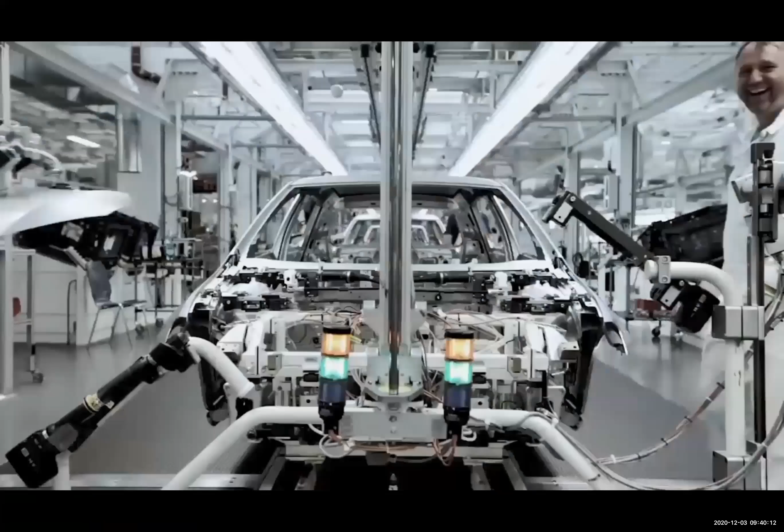New technologies are changing the world. They're also making the cars manufactured by the Volkswagen Group more efficient, safer, and more customer-friendly. The nature of car manufacturing is also changing in a similar way. In fact, the next batch of innovations is so extraordinary that experts are already declaring the dawn of a new industrial era, Industry 4.0.

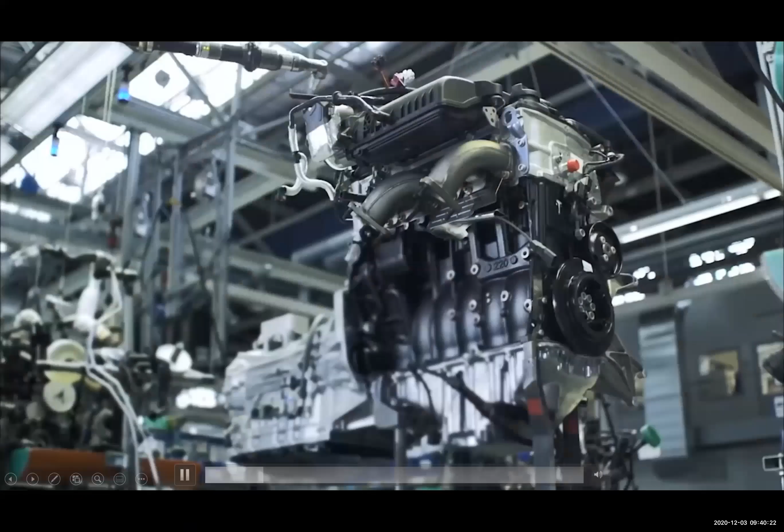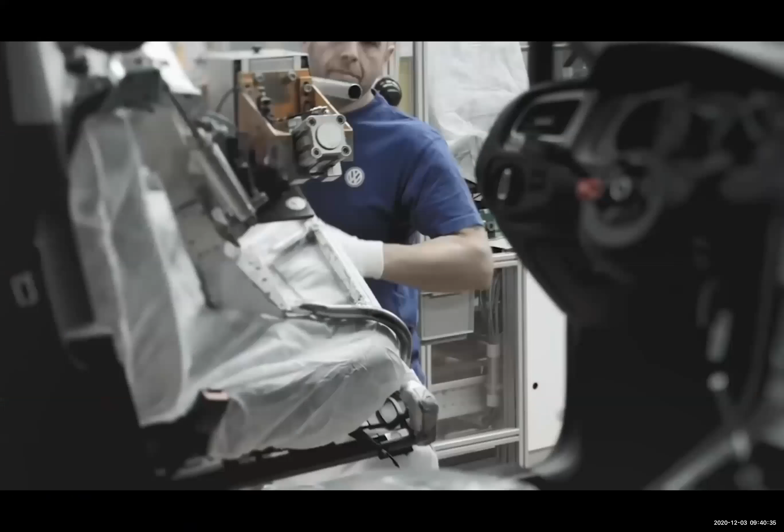So what does manufacturing look like today? Traditional car production involving hundreds of identical vehicles lined up in a row no longer exists. The options available to customers are now so vast that each car becomes a unique and individual object.

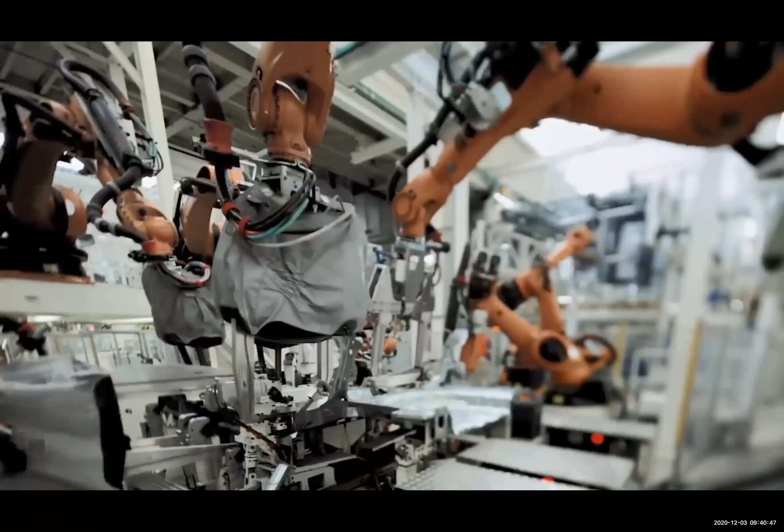Cars are now manufactured to order. Data makes its way from the customer's order to the Volkswagen Group's systems and then to each individual section of production.

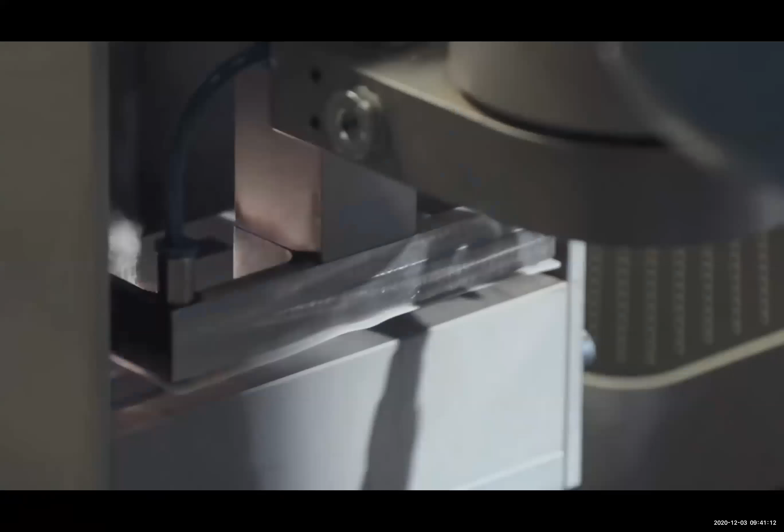A car consists of many thousands of individual parts. The press shop processes blanks for the bodywork. In the body shop, the car is baptized - in other words, it's given an RFID tag that can track it via radio frequency. This establishes which car body belongs to which customer order. The paint shop also receives information from the system world.

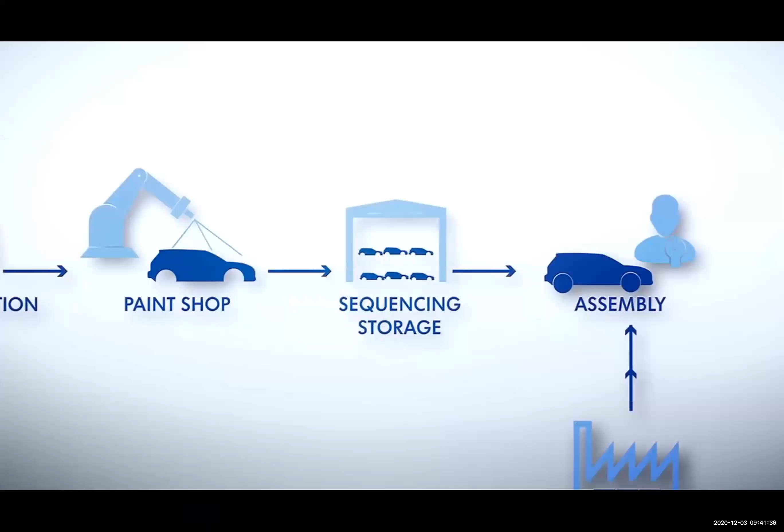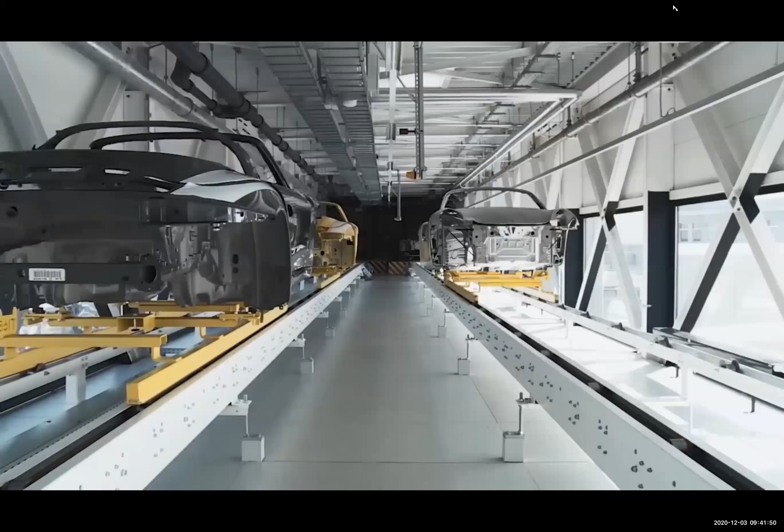In sequencing storage, the cars are placed in an optimal order for assembly. From here, information is transmitted to suppliers and pre-assembly as to which part is required when and where. In final assembly, the finished car emerges.

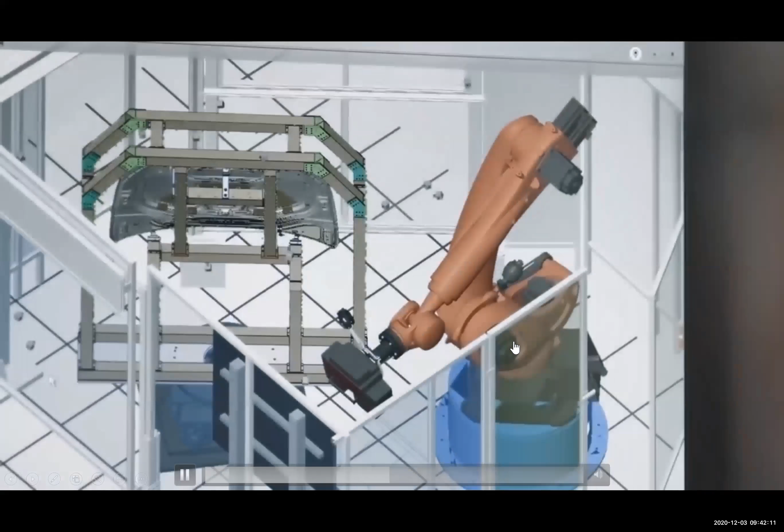The Volkswagen Group manufactures its cars using state-of-the-art technology, but development and innovation never stop. What does the future hold in store?

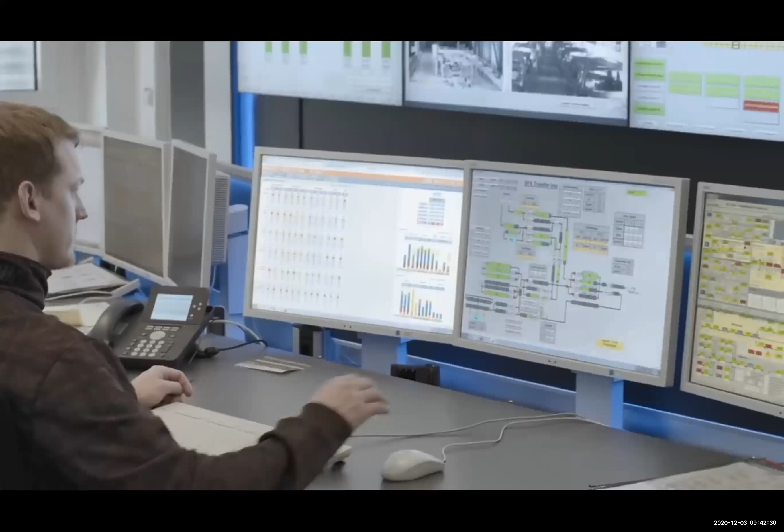Today, everybody is talking about Industry 4.0. It is a term used to describe a variety of innovative production processes. But what exactly does it mean? The Volkswagen Group has been shaping the future with groundbreaking projects for many years. Here are some recent examples.

Digitalization: the digitalization of all elements of production is essential for a new era in industrialization. Everything is given a virtual likeness in the system world. The result is an Internet of Things.

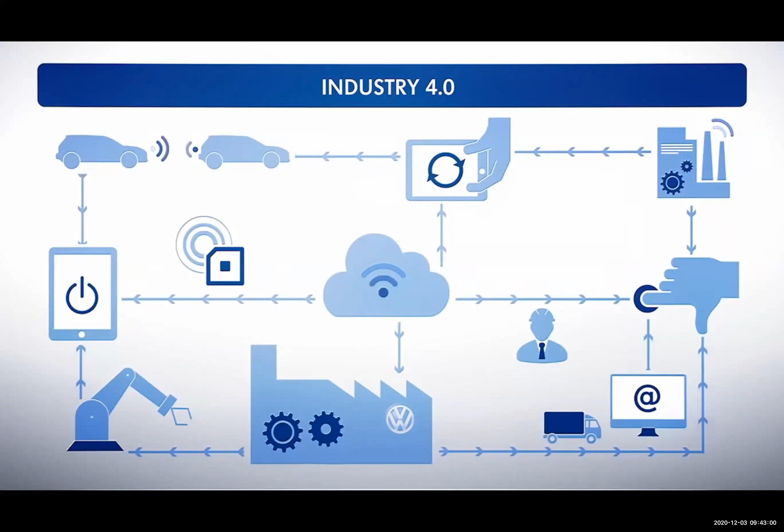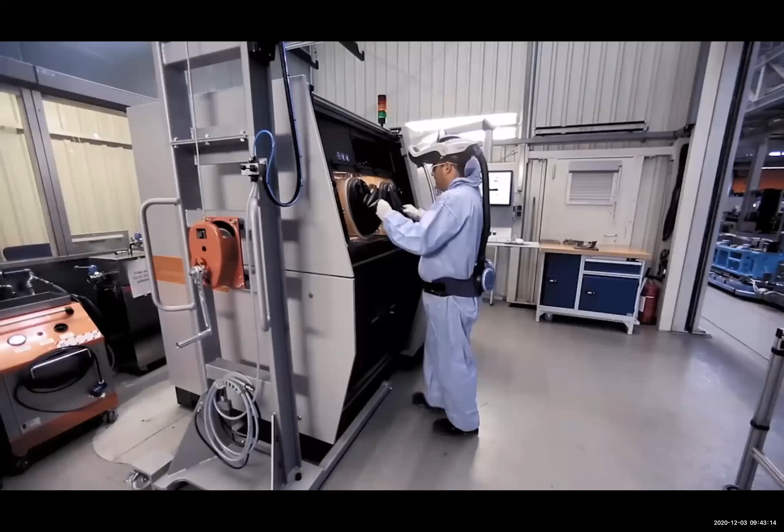Example, 3D printing. Pressing tools are no longer shaped in a laborious manner. Instead, these tools can be made from steel granulate in a 3D printer. It's a technology that opens the door on completely new possibilities for design, with a level of precision unknown until today.

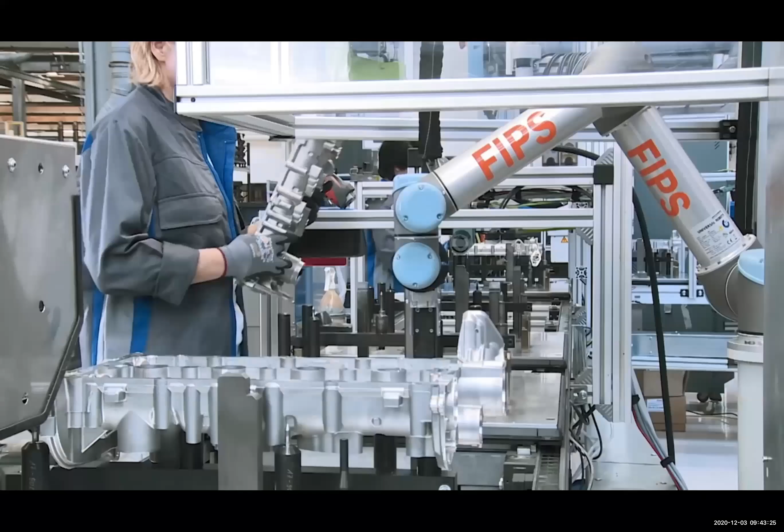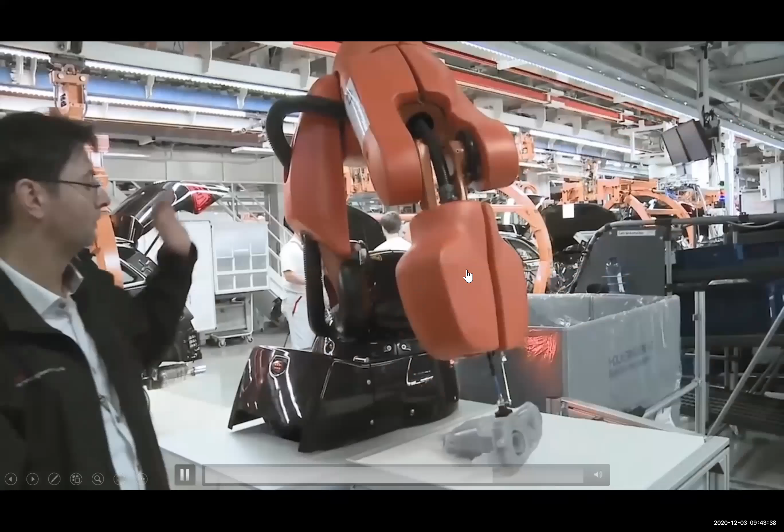Example, human-robot cooperation. In the past, protective grids separated robot arms and employees. In the future, employees and robots will work increasingly hand in hand. This is made possible by new security sensors. Robots take on especially monotonous and arduous activities. Today, robots already play a part in contributing to ergonomic workplaces at the Volkswagen factories in Chemnitz and Salzgitter.

Example, Big Data Monitor in logistics. The Big Data Monitor enables rapid visual processing of data from the 1,200 suppliers of the Audi factory in Neckarsulm. Where are the potential bottlenecks? Where is the greatest need for action? This data is now easily accessible at all times.

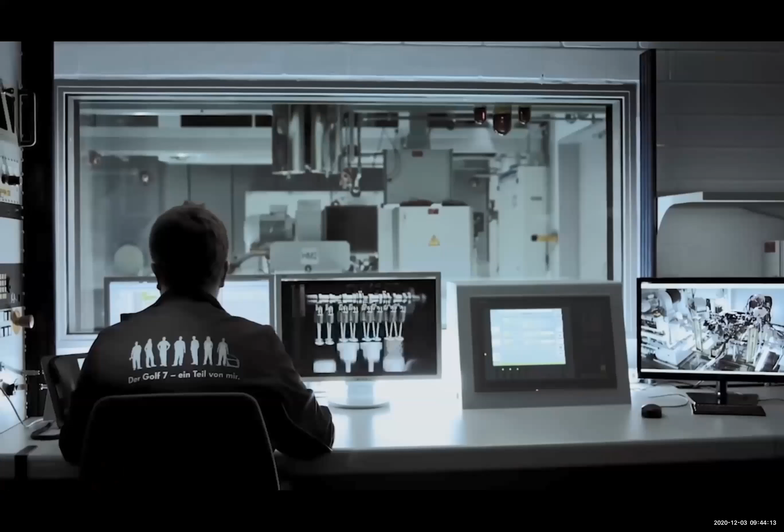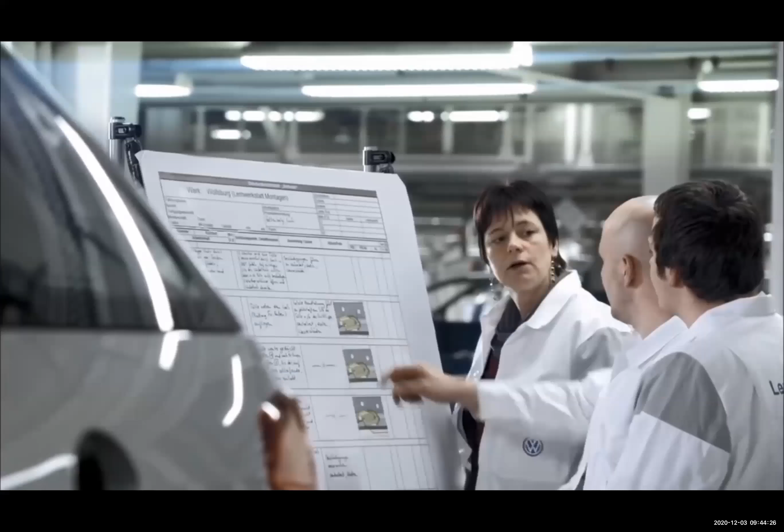The intelligent factory of tomorrow paves the way for efficient and cost-effective production unlike ever before. Industry 4.0 also means brand new opportunities for employees. The Volkswagen Group has already begun actively preparing its workforce for the future. The world is changing, not only in the automotive industry. Everything is in motion, and the Volkswagen Group provides the technology that moves the world.

Yes, so that's Industry 4.0 for you. So Industry 4.0 is basically a combination of technologies, I would say - Internet of Things, data analytics, and then artificial intelligence, robotics - everything put together would be your Industry 4.0. So it's a combination of technology where each machine can communicate with other machines and then to the control unit, and then the production becomes more interconnected and smarter. So that is Industry 4.0.

Even in the production of cars and automobiles, no more thousands of identical products are being produced in the industry. So each customer, we as a human being, as a customer, can tell this is how unique I want my car or bike to be. Even Royal Enfield have launched, you can choose to design your engine guard, the seat, the alloy wheel style, and then the silencer, everything.

So this data is fed into the production unit, and then each vehicle is identified by an RFID tag, and through the RFID tag, the entire production process is being taken forward. So this is how Internet of Things and smart systems help us in the fourth industrial revolution.

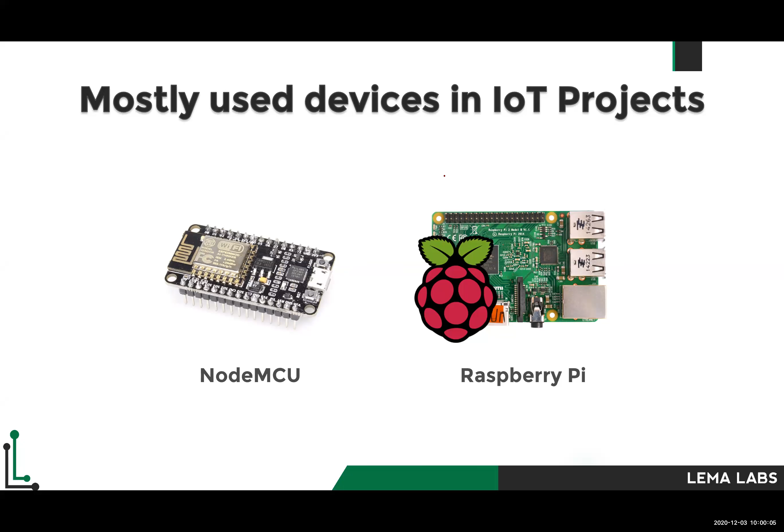So now, what are the other boards? Are Node MCU and Raspberry Pi the only devices available for you? No, we have a lot of very well-known devices available in the market as well, like ESP32, which is an advanced version of ESP8266, because this has both Wi-Fi and Bluetooth connection in the board itself. So for wearable technology, it is recommended to go with ESP32.

And then we have other boards like BeagleBone, Tessel, Intel Edison, and also Texas Instruments have a lot of boards. Apart from that, when companies design products, they won't choose boards like this, they will definitely choose a platform to work with, either STM or ARM microcontrollers, and software that can be used for device connection. Through the session, I'll definitely help you understand how you can write programs, connect devices, everything. So please be patient and listen to the session.

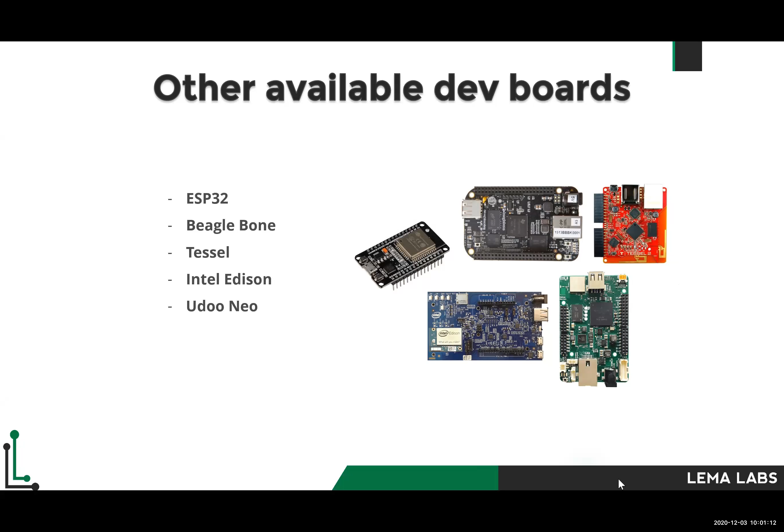So now, the board that we have chosen today is a Node MCU. Why we are choosing a Node MCU is, I'm sure your students would have taken an Arduino board and come to you showing their projects for so many years now. Arduino is the most commonly used open source platform when they work on a hardware related project.

So with Arduino, if you give a Wi-Fi capability, that is equal to a Node MCU. Node MCU is an open source platform again, and it has an inbuilt Wi-Fi chip in it, and you can program it using Arduino. Not just Arduino, it supports many other programs like Lua script, even embedded C also you can program, but you can program it using Arduino as well. So people prefer a Node MCU development board because of these reasons.

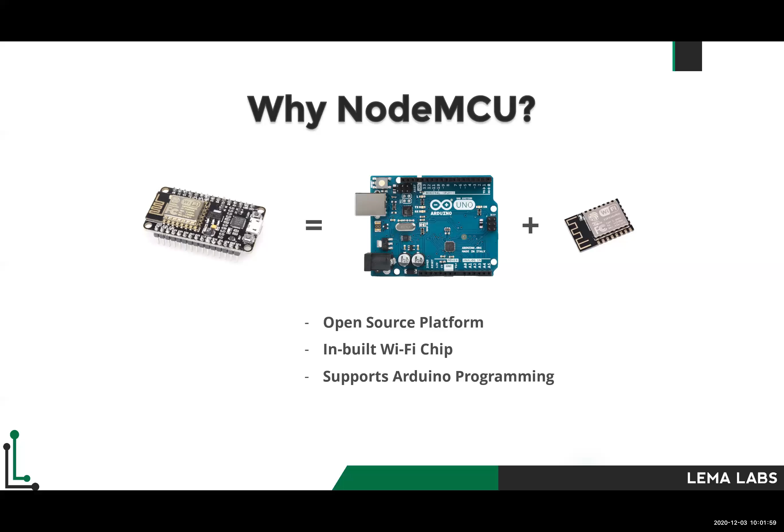So what you're going to learn today, practically in the sense, you can definitely try out after the session. Even some of the parts, if you are having a system with you, you can try in parallel as well, and see if you are also able to work and design like how I'm doing from here, showing the demo. So what you will learn through the session today, first thing - software. Someone was asking what software should I use to work with IoT.

So today I'll teach you how you can program an Node MCU microcontroller board. That is the first knowledge that I will share with you.

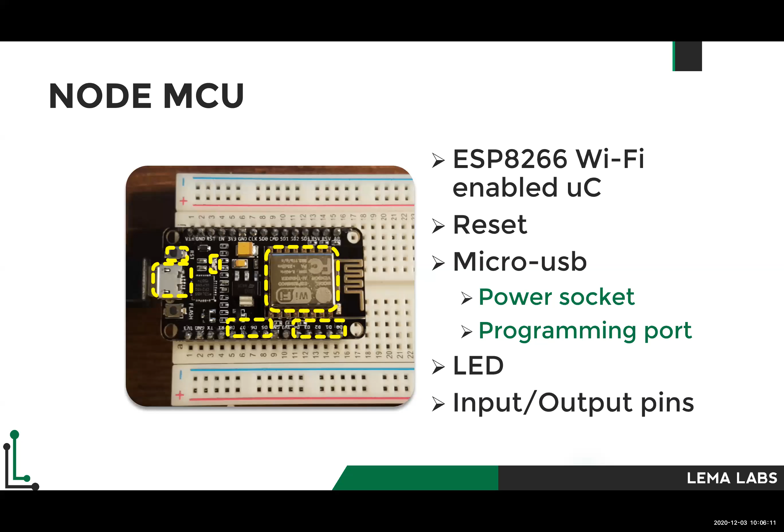You can see the pins that are here, and even on screen you can see the breadboard connection. Here you see a lot of pins - those are the pins to which you will interface your input and output peripherals. So it has a Wi-Fi enabled microchip, and all input and output peripheral interfacing pins. It has some inbuilt LED, a reset button, and a micro USB to quickly program and power it up as well. So these are the highlights of a Node MCU microcontroller board.

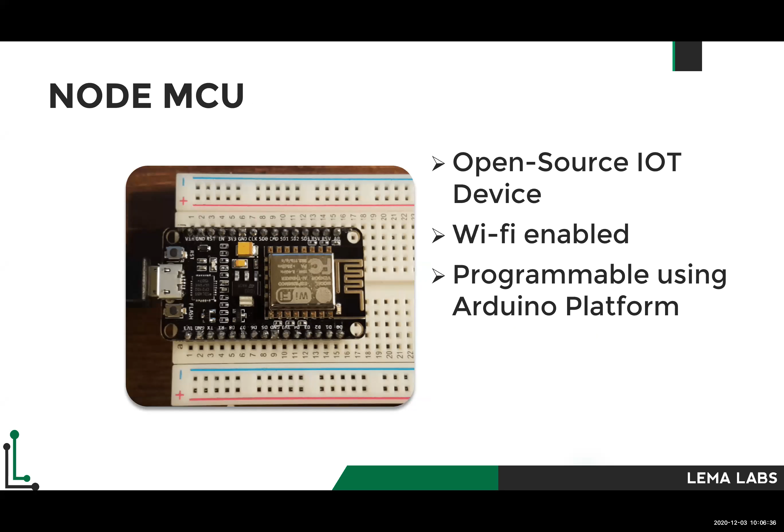The reason I have already told you why we can choose a Node MCU board is simple: it's an open source device, Wi-Fi enabled, you can program it with Arduino, and it is also cost effective. This board will cost you somewhere around 300 to 350 rupees, not more than that. You can get a board, have it with you, and start building a lot of interesting IoT related applications.

Now, to learn how to program this particular board, you have to learn Arduino programming. I know it's very beginner level - I'm not sure how many faculties here have already worked with Arduino or have knowledge about how to work with an Arduino board or a Node MCU board. But please be patient if you already have knowledge on this. The next 5 minutes will be very useful for people who are getting started.

Every Arduino program has two functions. The first function is setup, and the second one is loop. In setup, what you generally do is all the initial setups, like making pins input, making pins output, configuring something, and anything else that you want.

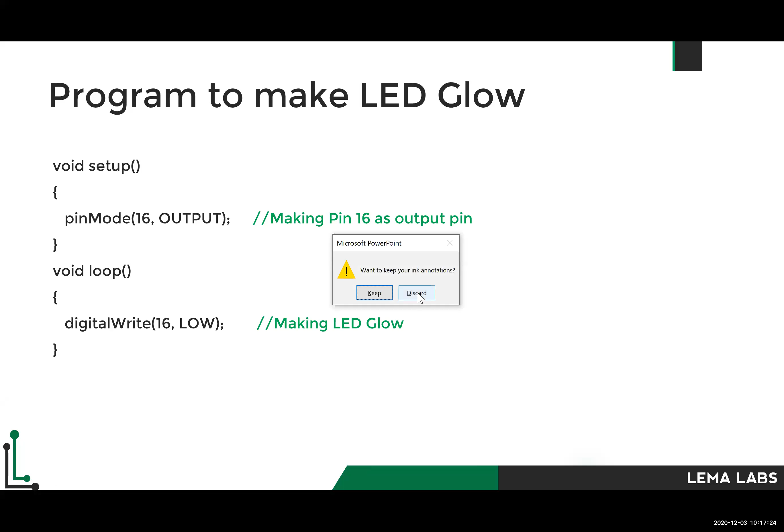Now let's see it practically, because it would be interesting if you see. So let me share my Arduino screen as well.

To program this particular board, all you need is this board and a micro USB cable, which you get in your phone charger as well. We can use that, so you can easily do that, right?

So now the steps, you're able to see the Arduino window. I hope you are able to see the Arduino window. Now, this is an Arduino software which you also can download. It's open source, free software. You can go to the Arduino website, download it, and install it. Everything will be ready for you. And then once it is...

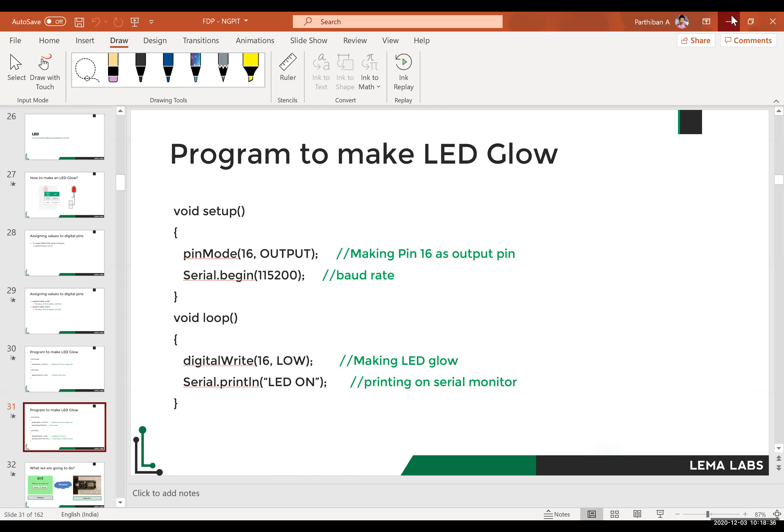Sir, Arduino window is not available. Okay, one second, let me change the screen share. I think I was sharing. Okay, now it seems... yeah, now it's... yes, sir. Yes, sir, great.

Okay, so the first step to start working on an Arduino project is go to File, New, very simple. These are basics, but still, if anyone is interested to work further, it would help them, so that's why I'm spending some time. So you get a project like this, very simple.

All you have to do is, first, in our case, we have to make pin 16 as output, so I'm doing that there. And then in loop function, we are going to turn on that LED continuously, so digital write 16 comma low. This will turn on that LED continuously, as simple as this. So this is how you write a program in the Arduino window.

And the next steps are go to File, Save. You can name your file with anything you want. I think already Sairam will be there, Sairam Institute is there.

So after these steps, the next important steps in any integrated development environment.

That's very informative, please go slow or repeat. If you're really interested in learning this from the basics, I can definitely repeat and make you learn in a slow and steady manner.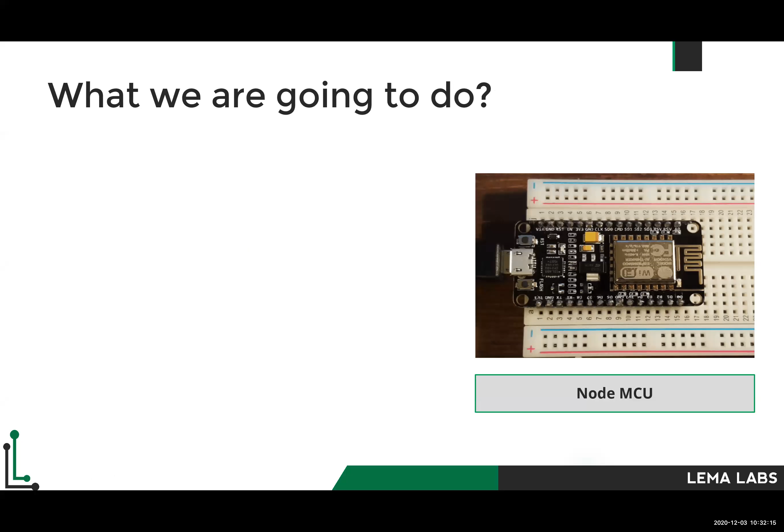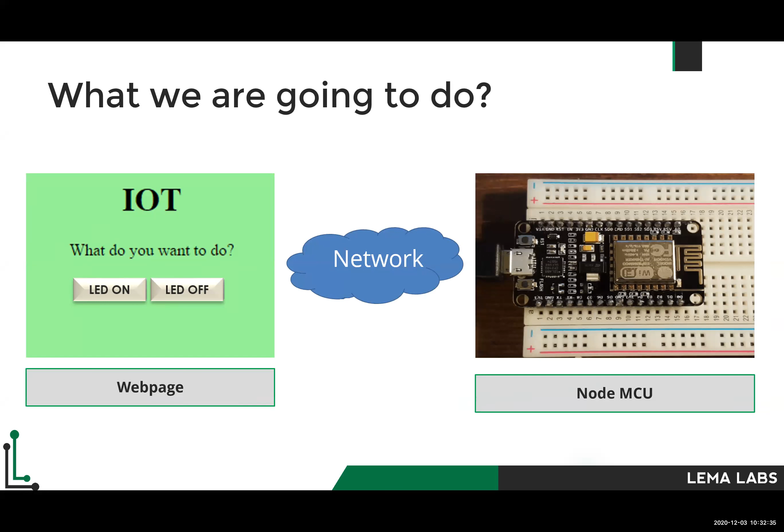What we are going to do now is take this Node MCU and do some programming in it, and create a web page with two buttons in it, LED on and LED off, and create a local network between them. The Node MCU will create a Wi-Fi network for you, to which you will get connected using your smartphone or laptop. By using these two buttons, when you press LED on, you will turn on the LED on the Node MCU, and when you press LED off, you will be turning off the LED.

So what we are going to learn or understand now is, you are going to create a server or an access point or a local network on your Node MCU, and create a simple web page with two buttons in it. In the local network, you are going to control the LED with the buttons wirelessly. That is what we are going to learn next.

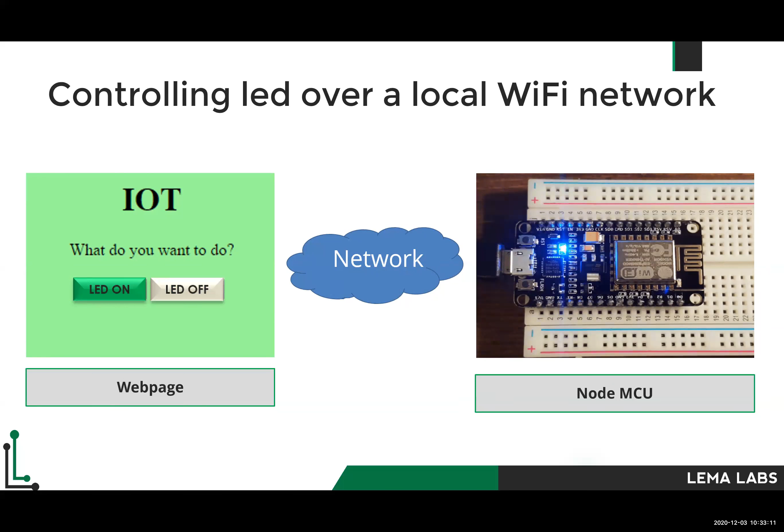So how do we do it? First step, we have to write a simple HTML program. What is HTML? Hypertext Markup Language. Yes, it is a language used to create web pages. We would have started learning all this from our school days itself, correct? So to put it simply, hypertext markup language consists of two parts.

And what markup language is, it is used to add or make text, images, links, web pages, and much more in the HTML programming. So that is why it is given the name HTML programming.

So now you very well know, being in the CSE background, all HTML programs are done between tags, opening tag and closing tag. When you start something, you use an opening tag, and when you close that particular thing, you use a closing tag. Elements of an HTML tag are nothing but what comes between the tags. For example, anything you want to print, or any title you want to give, or anything you want to appear, these are called elements, right?

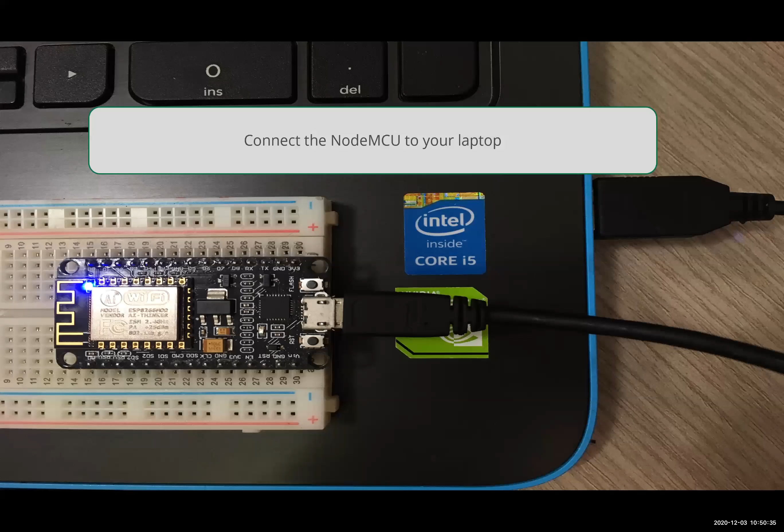So the entire HTML code, the response, that is server.send, okay I'm sending you a text or HTML file, and it is myHTML, the entire code that you have written. And whenever there is an argument, if 0 is pressed, turn on the LED, if 1 is pressed, turn off the LED. And how do you keep the connection alive? Server.handleClient function. If you have this, your job is done. Your project will work like you can control anything in the local network. So now let's go and quickly program this and see how it works.

So where is the Arduino?

And this step is the first step. What is the first step? Creating a server. Exactly. And then the remaining, creating an access point.

So now let's quickly compile this file. Okay, compiling. Let's upload. It is getting uploaded.

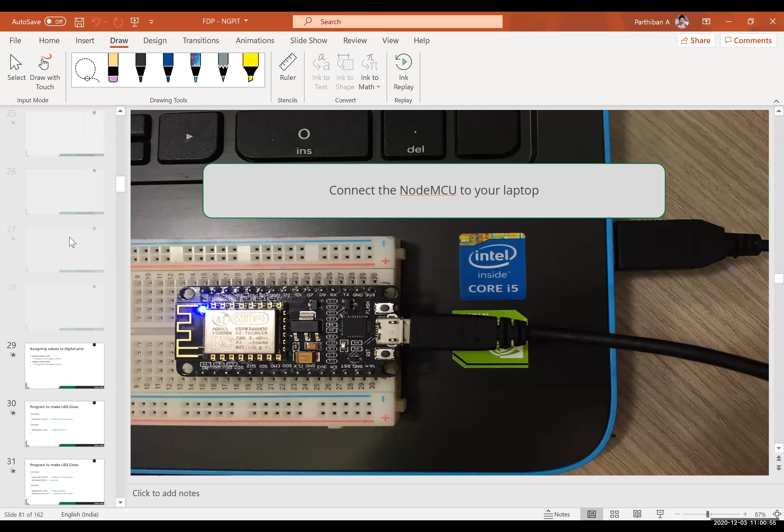And moreover, during the programming, when we use the semicolon or curly bracket, are these like in a language, as we are using punctuations? Yes, exactly, all these are exactly the same.

So this is your doubt, right? Let me first clarify this. Sir, I'm not getting your voice properly. Can you see my screen? Yes sir. So now, generally when an LED works, when you have a higher potential at the positive terminal and a lower potential, preferably ground, at the cathode, the LED turns on, correct? Yeah, the same thing happens here.

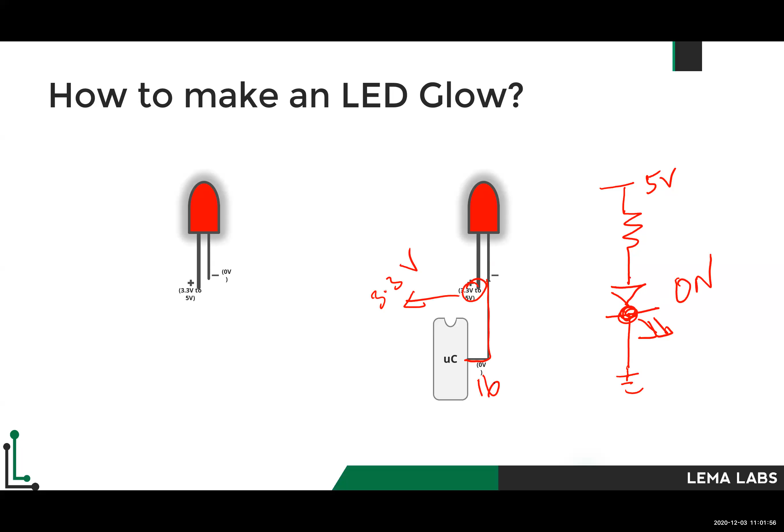So this positive terminal is connected to 3.3 volts on the microcontroller board. The negative terminal here comes to pin number 16. Now, if you want to turn on this LED, it has a positive supply on the positive pin, and the negative pin should have 0 volts as potential, correct? So how do you give that 0 voltage? By making that particular pin value low. So when you write a program, digital write pin 16 comma low, in the microcontroller, the voltage at pin 16 goes to 0 volts. That will turn on the LED.

Now similarly, if you want to turn it off, instead of 0 volts, if you connect it to 5 volts, will this LED glow? No, because there is no potential difference. Same thing here: when you make this pin high, that is high in NodeMCU is 3.3 volts. When you make it 3.3 volts, that is high, the LED will not turn on. So this 3.3 volt is connected with the negative pin, the cathode.

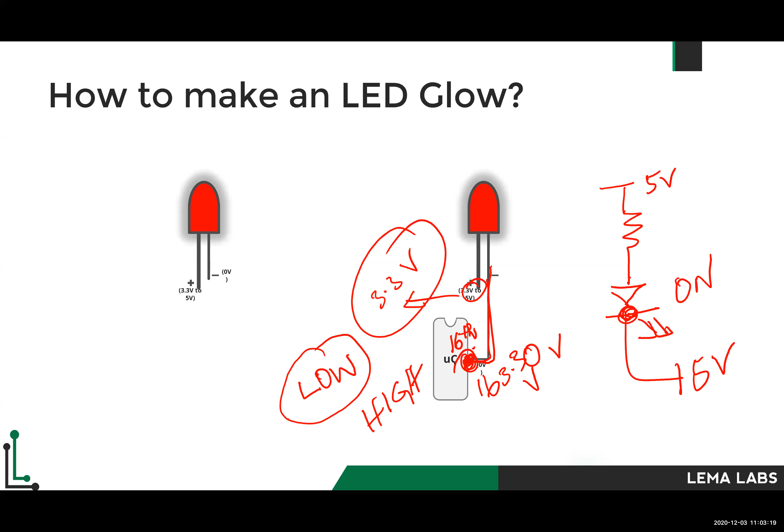So this LED is connected with the Uno board, you want to say? The pin number 16 here. Pin number 16, okay. Got it? Yes sir. Okay, we'll take a quick break, and at the end of the session I'll help you clarify further. Thank you sir, yeah sure.

Parthiban sir, you can take a break yourself, sir. Thank you, sir, thanks for all. We'll come back by 11:30, I'll have a coffee. Have a break, sir. Yes sir, please.